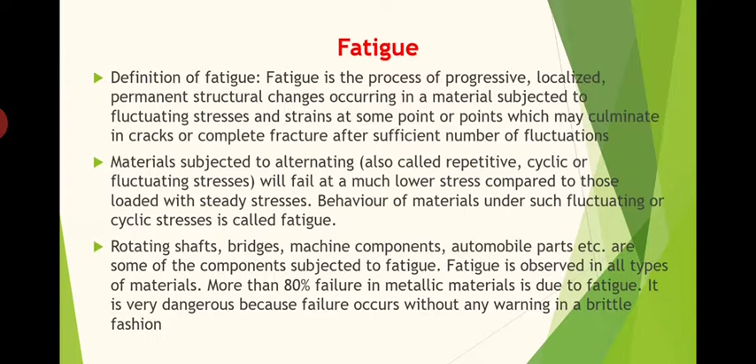Okay, now coming to the different types of fatigue, mechanical fatigues. First one is vibration fatigue. Vibration fatigue is a type of mechanical fatigue caused by vibration of the equipment or piping during operation. See, because of the vibration, every particle in the machine component will have alternating stresses induced in it. So because of the vibration we can have the fatigue effect, that is what is known as vibration fatigue.

Vibration-induced fatigue damage is typically caused by poor design, lack of support. See, if we are not providing enough support or dampers, then mostly vibration fatigue will take place and finally it will break down, or excessive support or stiffness. The amplitude and frequency of vibration are critical factors for vibration fatigue damage that lead to crack initiation and crack propagation. Okay, so that is all about vibration fatigue. The fatigue created by vibration is simply known as vibration fatigue.

Similarly, another thing is corrosion fatigue. See, corrosion also has an important role in fatigue development. Because of the corrosion, some surface defects may happen. Once the surface defect happens, or initially some crack is generated within the surface, because of the repeated cycles it easily breaks down. So corrosion is also an important reason for fatigue formation. So the fatigue failure happening because of cracks developed by corrosion is known as corrosion fatigue.

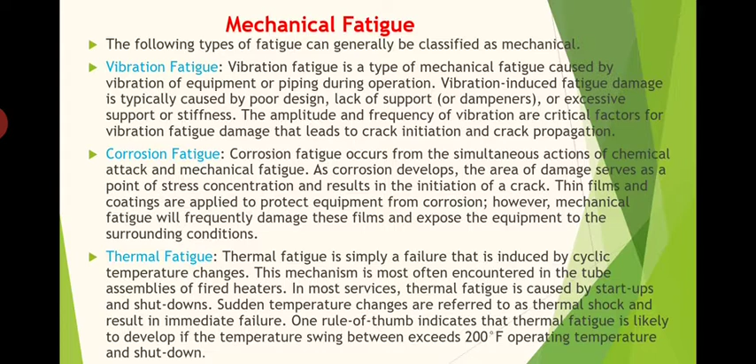Because of these reversed stresses, there can be a possibility of fatigue failure also. That is what is known as thermal fatigue, or simply the fatigue happening because of temperature differences within the material in a short interval of time is known as thermal fatigue. Okay, those three are the major classes of mechanical fatigue happening in machine components. Now, I have already told that fatigue is happening because of the fluctuation in the stresses within the material.

So if a material is acted upon by a steady stress, then it will withstand a high load. But in case of fluctuating stresses or cyclic stresses, what happens is its strength is lower. That is what is happening. It will ultimately break down at a lower stress than that we expect it to fail.

Okay, so in order to study this topic, we must have an idea about what stress cycles are. In general, there are three types of cyclic loading. The first one is the reversed or sinusoidal stress cycle. This figure shows the reversed stress cycle. You can see this is the mean, the x-axis. Above this the stress is positive, that means tensile stress, and below this the stress is negative, that means compression. So below this line it is compressive stress, and above this line it is tensile stress.

So the stresses acting over a material are of the same magnitude, but of different sign. For an instant of time tensile stress is acting on a material. The very next instant the same material is having compressive stress. So alternately tensile and compressive stresses are acting on a particular material, but the magnitude of the tensile and compressive stresses induced on the material is the same. See, sigma, this is the tensile stress acting, and this is the compressive stress acting. Both sigma max will be the same.

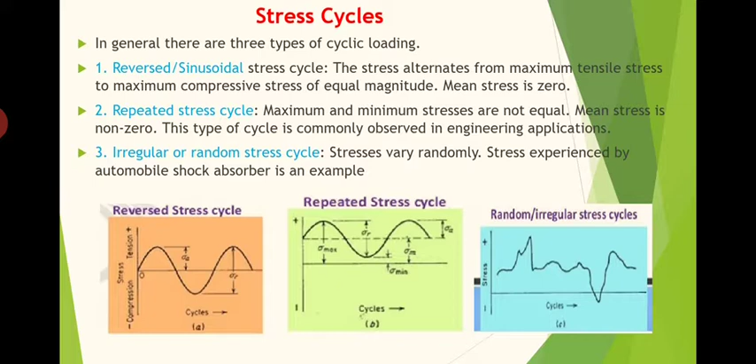The stresses vary randomly. Stress experienced by an automobile shock absorber is an example. Of course, the stress experienced by metallic bridges is also an example of irregular random stress cycles. So these are the three different stress cycles. Now coming to the terms related to cyclic stress; only then can we move on to fatigue failure. These three terms are important as far as cyclic stress is concerned.

You can see a figure here. This is the cyclic stress, of course, of the repeated stress cycle type. You can see the origin here, and this is the mean stress, sigma m. This one is amplitude stress: how much stress is there above the mean, that is amplitude stress. Here we have the same thing towards the negative side, that is, towards the compression side, and here we have the time.

Range of stress, stress amplitude, stress ratio: these are the three important terms we have to study in this field. They are calculated using mean stress, so all three terms are defined based on the mean stress. So first we have to define what mean stress is. Mean stress is sigma maximum plus sigma minimum. Sigma maximum is from the origin to here, and sigma minimum is this much. So mean stress means sigma maximum plus sigma minimum.

The sum of sigma max plus sigma minimum divided by 2, the average value of sigma max and sigma minimum, is known as sigma mean. Mean actually means average, so sigma max plus sigma minimum by 2. Now range of stress is represented by sigma r, shown here. Sigma r is sigma maximum minus sigma minimum. The magnitude between maximum and minimum is known as range of stress: sigma r equals sigma max minus sigma minimum.

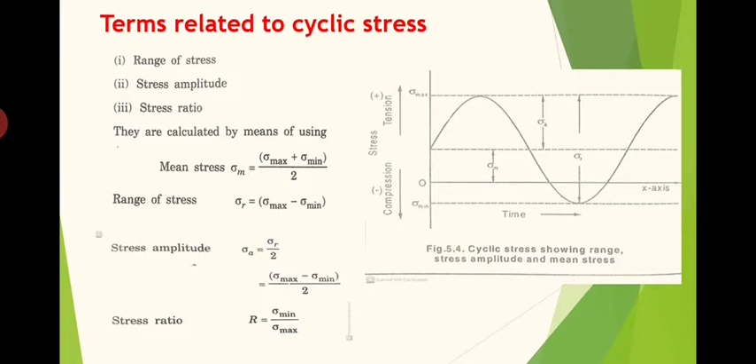In the case of the reversed stress cycle, the stress ratio will be equal to -1, since sigma minimum will be equal to minus sigma max. But in the second case, we will have a particular value. Usually the sigma minimum value will be less than sigma max, so most probably the stress ratio will be less than 1.

Now coming to primary and secondary stress raisers. The word itself says it: stress raisers. At some points within the material, the stress developed will be much more compared to other regions. Of course, this happens due to some damages and so on.

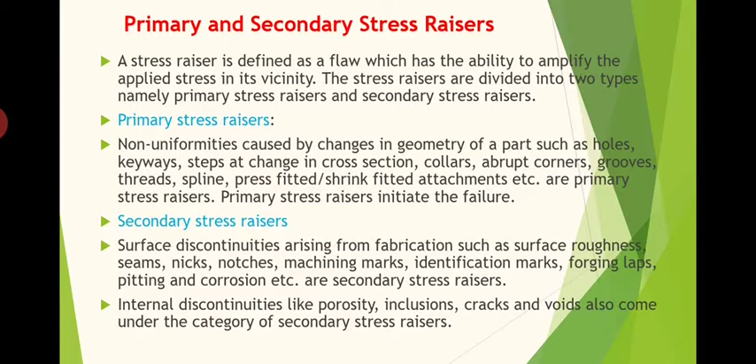So because of all these activities or fabrication processes that we are conducting over the material, the stress concentration as well as the irregularities will happen over the surfaces. That is what is categorized as secondary stress raisers. Internal discontinuities like porosity, inclusions, cracks and voids also come under the category of secondary stress raisers. I hope the idea is clear. Primary is because of the shape changes and secondary is of course because of the fabrication process. That is the simple one.

Okay. Now before moving to how fatigue is happening, we must have an idea about how the fatigue test is conducted. We have to test the material for fatigue strength. That is what is explained within this slide. That is the fatigue test. The most common type of fatigue test conducted is the rotating beam fatigue test.

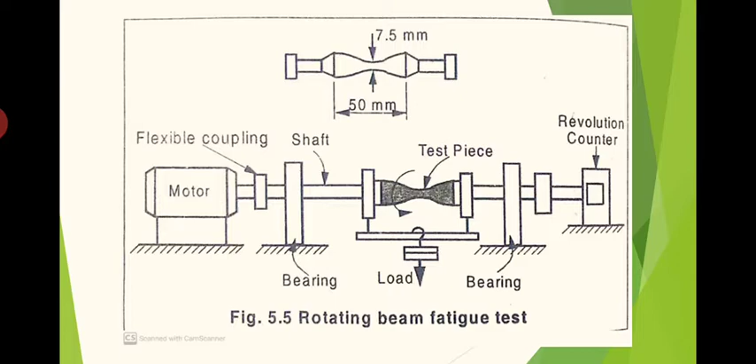Okay, now that specimen is loaded in pure bending and rotated with the help of a motor. See, the loading is that of pure bending. Pure bending you might have studied in mechanics of solids. With each rotation, all the points on the circumference of the specimen will alternate between tension and compression.

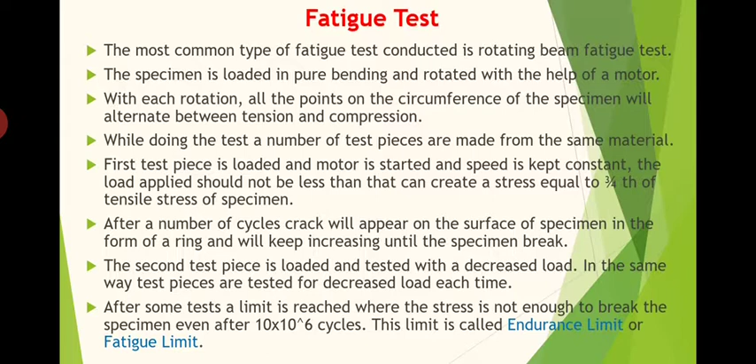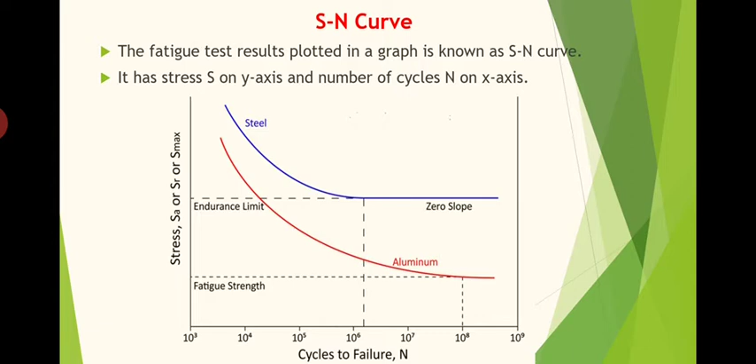So to define fatigue strength, we need a fixed number of cycles. That number of cycles is defined as 10 into 10 raised to 7 or 10 raised to 8. So for 10 raised to 8 number of cycles, what is the load required for the fracture to happen? That is what is known as fatigue strength. In general, higher the stress, lower is the cycles to failure. If the stress applied is much higher, the fracture will happen at a lower number of cycles. For material like steel, that is ferrous material, the SN curve becomes horizontal at higher N values. The corresponding stress level at the horizontal portion is called endurance limit.

See, finally the curve will become horizontal. That horizontal limit is known as endurance limit. It is the largest fluctuating stress which will not cause failure after infinite number of cycles. If you are keeping the load below that endurance limit, the material will not break even after infinite number of cycles. Generally, it is 40 to 50% of the tensile strength.

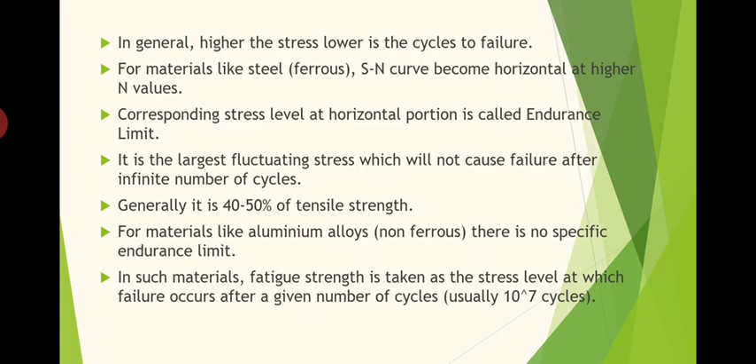For materials like aluminum alloys, that is non-ferrous, there is no specific endurance limit. In such materials, fatigue strength is taken as the stress level at which failure occurs after a given number of cycles, usually 10 raised to 7 cycles. So that is all about fatigue and SN curve. In the next presentation, we will be discussing different factors affecting fatigue strength, how it can be eliminated and all.